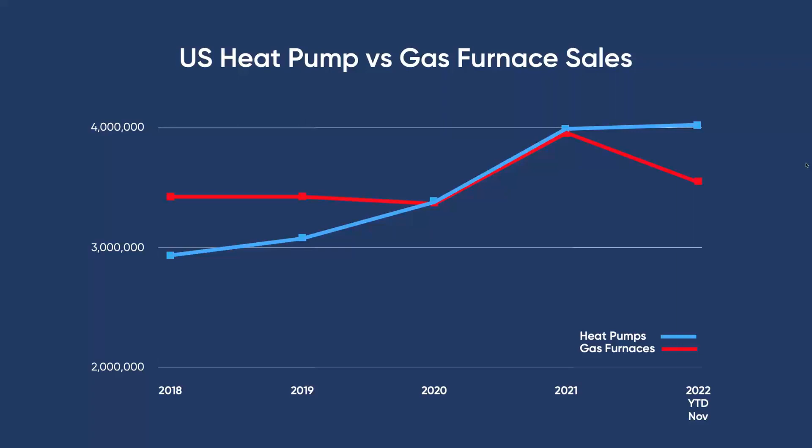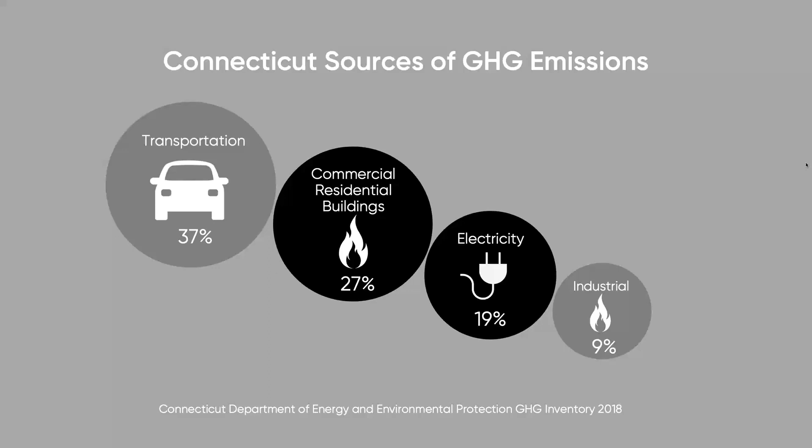And we're seeing these trends when looking at Connecticut's specific sources of greenhouse gas emissions - the second leading source of greenhouse gas is combustion in commercial and residential buildings, at 27%. When you combine that with greenhouse gas emissions from transportation, from electricity, from natural gas and coal being burned for electricity, and industrial uses, you're up to 82% of Connecticut's emissions coming from burning fossil fuels.

So there's a big movement to start regulating and moving away from this combustion.

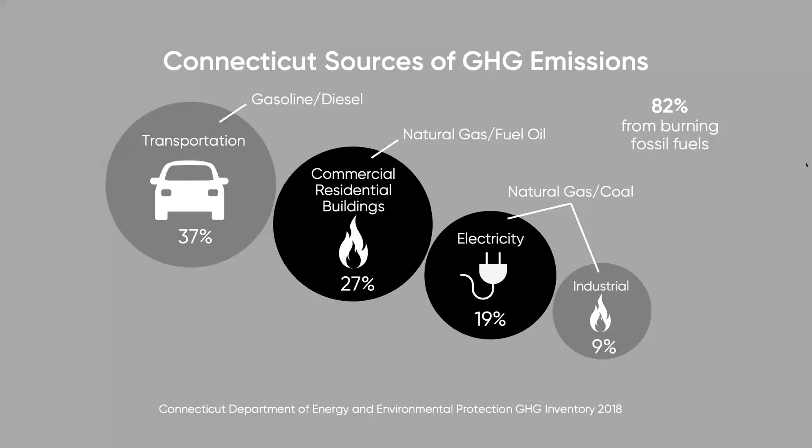And it's not only bad news, there's great news too. We're seeing these trends - who would have thought 10, 15 years ago, when wind and solar were some of the most expensive electricity sources on the market, that we'd see this radical transformation shift just when we needed it? Wind and solar becoming the lowest cost electricity options today, the fastest growing.

In 2022, I saw an article that 20% of our electricity is coming from renewables in the United States, and this is growing really quickly. Coal fell from 50% of our electricity mix in 2008 to under 20% today. So there's a radical shift in electricity production towards renewable energy.

And it's almost this perfect, great storm. Electric appliances that we'll be talking about in a second have gone from really wasteful and inefficient to really efficient, as evidenced by the LED light bulb, which is 5 times more efficient than the incandescent light bulb. And electric appliances have become more efficient, and electricity has gotten a lot cleaner.

And so you're seeing this movement towards electrifying everything - this theory that we should power all of our homes, all of our transportation, and as much industry as possible with clean, efficient, renewable electricity. So you'll be hearing that terminology, 'electrify everything', more and more. It's starting to become a popular term, and it conjures up that idea of a sustainable future.

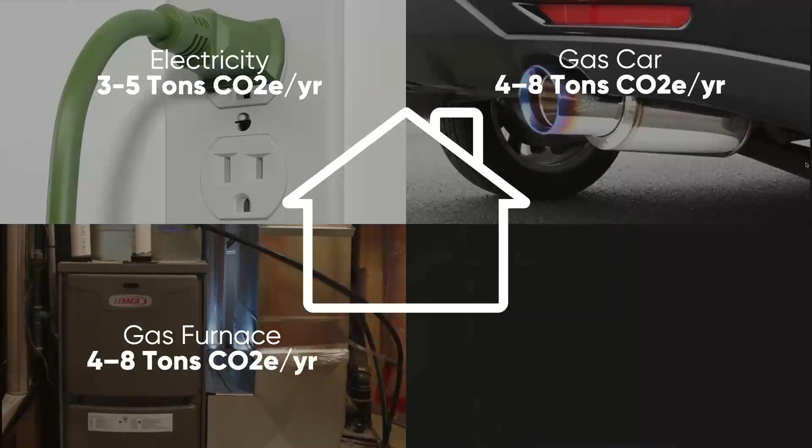The best way to really understand this is to think about our own homes. The four biggest sources of emissions in any home in the United States are: the electricity we consume, typically around 3 to 5 tons of carbon emissions per year; one car, 4 to 8 tons, and most families have 2 cars; one gas furnace, pretty similar to a car in terms of emissions produced over a year; and a gas water heater, which is surprisingly high. These are the four largest sources of carbon emissions in any of our lives.

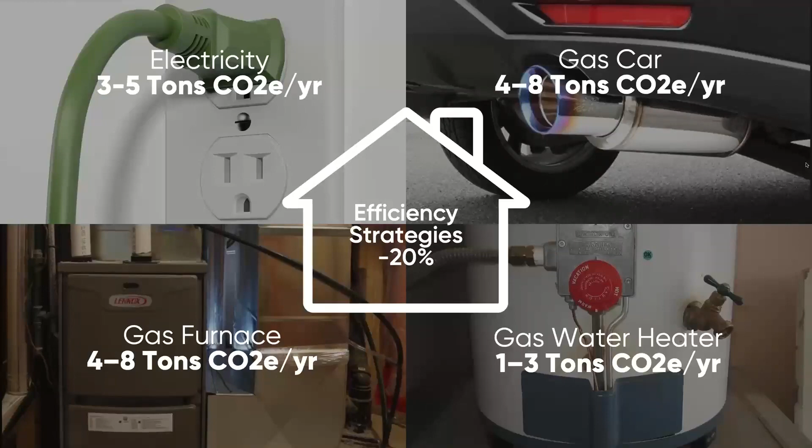If we employ these efficiency strategies, which we've grown up with, like turning the lights off, getting a more efficient car, driving slower, turning the heat down, taking cold showers, all these things, you might reduce these numbers by 20% if you're really diligent and take cold showers frequently, which most people don't like doing. But compare this with an electrification plus renewable energy strategy, and you can see how much more effective this is.

It's possible to get renewable energy. Anyone can do it today by signing up for a green power plan, putting rooftop solar on, or subscribing to community solar if that's available in your area. So you can get 100% renewable electricity. You can charge your car with that. You can use that to fuel your heat in your home and your water.

Instead of all those numbers you saw before, we're creating zero emissions for all these four largest sources of emissions in our lives. A typical home, instead of producing 20 to 30 tons of carbon emissions per year, could be producing zero. This is what an all-electric home, a zero-energy home, could also achieve.

One of the beauties is that the electrification technologies have efficiency built into them. Your electric car is many times more efficient than a gas car. And that's true for heat pumps, heat pump water heaters, just like the LED light bulb. So you get built-in efficiency with electrification.

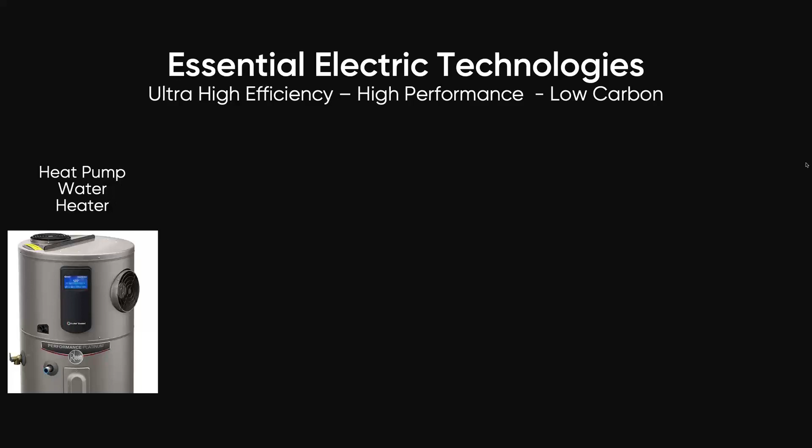So the technologies that really make all-electric homes possible are all ultra-high efficiency and high-performance products that we'll talk about specifically: the heat pump water heater, heat pumps for space heating and air conditioning, induction ranges and cooktops, electric fireplace inserts, which are less talked about but also pretty amazing and something you should be familiar with. And then, not always a top-of-mind concern, clothes drying—obviously using gas for that is not great. Electric dryers are good, but these heat pump dryers are pretty amazing. They're starting to be available.

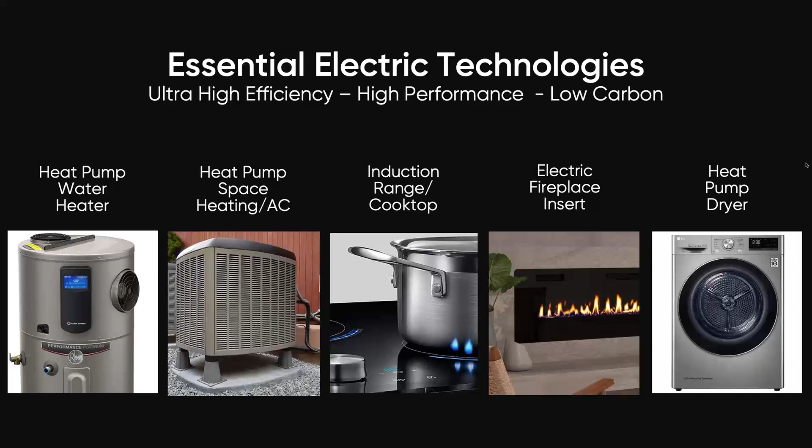Behind a lot of these technologies are heat pumps, and those can feel really magical to people because they're a little hard to describe how they work. Some of you are very familiar with these, but I like to point out that our refrigerators are heat pumps. This technology has been in our lives for decades, available for over 100 years, and it's been perfected over that time. So this is not some kind of new technology.

They're insanely efficient. Just a couple summers ago, you may have read about the Portland heat dome. Before we turned our air conditioning on, it was almost 100 degrees in our kitchen, and our refrigerator was still making ice. So you can see these things can make cold air even when it's hot, and obviously the opposite is also true, which we'll talk about.

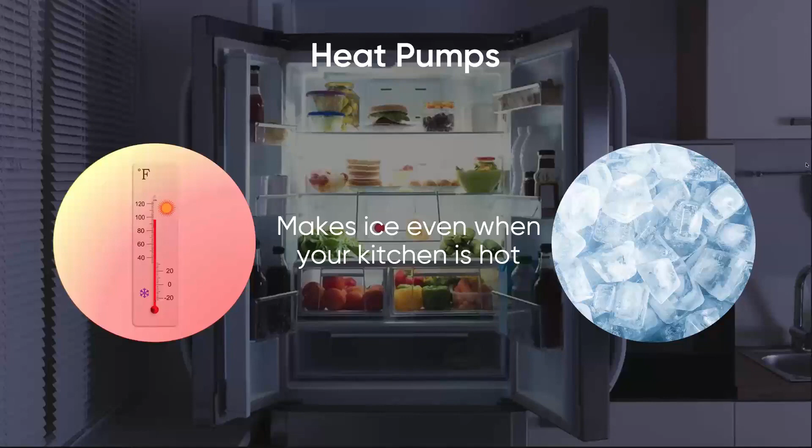They've become perfected over time, which is why the levels of efficiency they're achieving make it so that they're cost competitive, and in some cases cheaper to operate than burning gas directly in our homes.

So let's dive into some of these individual technologies, and then we'll see how they all fit together into the modern electric home of the future and home of today.

The heat pump water heater is something near and dear to my heart. Brian was saying to our hosts just before the call, I do have a heat pump water heater costume. I didn't bring it today, but I'm happy to. I'll put a link of me dancing in it later on in the chat.

Heat pump water heater is a really game-changing appliance, just like all heat pumps. It is 3 times more energy efficient than an electric resistance or gas water heater. The only thing it exhausts is cold air, so there's interesting potential there to cool the space.

It draws the heat from the ambient air, from the room it's in, so they work really great in basements or garages. But they can also go in utility closets, and I'm happy to answer questions on the amount of airspace needed. They just draw that ambient air and exhaust cool air.

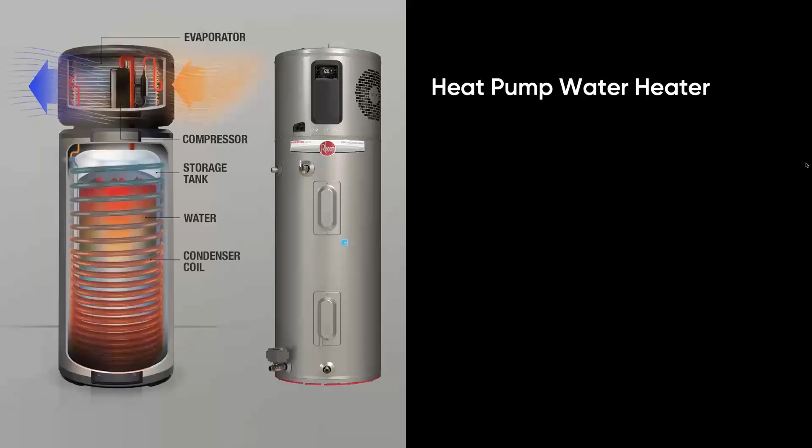They're quieter than gas power vent models. The newest heat pump water heaters are at 45 decibels, which is the range of a quiet dishwasher. And they're smart and able to be connected to the internet so they can participate in demand response programs, or if you want to turn down your water heater while you're away using your phone, they can do that too. So let's look at how heat pump water heaters work.

They pull that ambient air from whatever space they're in. And I should also say they can be ducted. In my house, for example, this doesn't happen - it's not required too often to duct a heat pump water heater, but if you're in a tight spot, you can duct it to the outside.

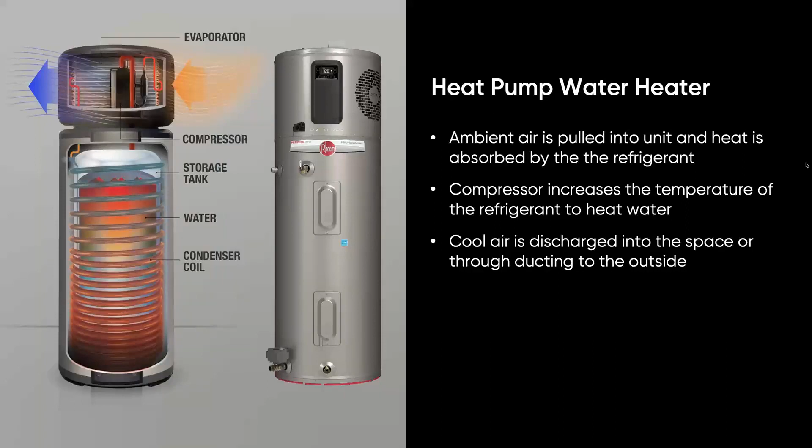You pull that air into the unit. The refrigerant extracts the heat, the compressor increases the temperature, and that cool air is discharged, and the heat then goes to heating the water. Most of the models on the market are what are called 240 volt heat pump water heaters. So they run in heat pump mode most of the time, but then they have electric resistance rods that can function as a backup, just like a normal electric water heater.

So let's look at the comparison of the different water heaters on the market. The 2, or we might even say 3 most common water heaters are - you can see on the left side - the electric storage water heater with electric resistance rods. Water heating efficiency is measured in UEF, so 0.90 is the electric storage UEF. And you can see tankless. These are kind of typical numbers, but there'll obviously be a range of efficiencies for each of these devices.

Right, exactly. So you may see lower than that on any of these, or higher - you can kind of see the range there. I won't read out all the numbers, but you can see how heat pump water heaters are 3 to 4 times more efficient than any other type of water heater. And Brian just put the numbers, the cost. The one challenge with heat pump water heaters is the upfront cost.

You can get your electric or the premium gas storage water heater for around $1,000, sometimes cheaper, the tankless as well. But the really efficient electric and gas water heaters are more expensive, and those are a little more cost comparable to the 1,700. As we'll talk about in a second, there are great rebates, 30% tax credit, on heat pump water heaters now, so that can take a chunk out of the upfront cost.

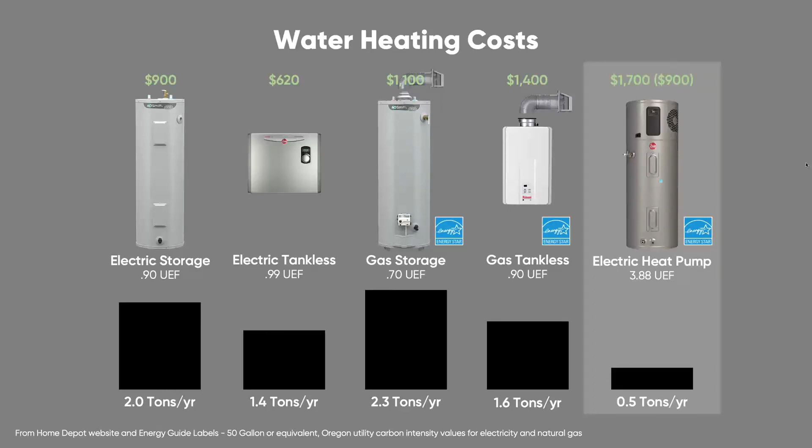This shows carbon emissions. Electric water heaters, 2 tons. The gas water heaters, even these efficient ones, close to 2 tons. Heat pump water heaters are 0.5 tons a year of carbon emissions, and of course that can go to 0, like Brian said, if you combine it with renewable energy. So much to celebrate with heat pump water heaters.

Just wanted to give a little landscape of what heat pump water heaters are on the market today. The big 3 makers are Rheem, A.O. Smith, and Bradford White. Starting from the left, Rheem is available in Home Depot, and as of 2022, they just announced their Rheem 120 volt plug-in water heater. You can actually plug that into an outlet, which is probably not necessary for new construction where you can just run the 240 volt, but these work great in retrofits, especially in gas markets.

A.O. Smith just released their latest Voltex AL water heater. I happened to write an article about it, and there's a lot of exciting things, like they have water connections both on the top and the side. It's 0 clearance, it's 45 decibels of sound, so a really fantastic water heater. Bradford White is only sold to contractors through distributors, but a really great water heater as well.

I also wanted to highlight that there are split system heat pump water heaters where the tank and the condenser are separate. This is the SanCO2, which is where the condenser is outdoors and the tank is indoors, but there's also Nyle water heaters where the condenser has to be in a semi-conditioned space as well. So lots of options, and increasingly more so for heat pump water heaters.

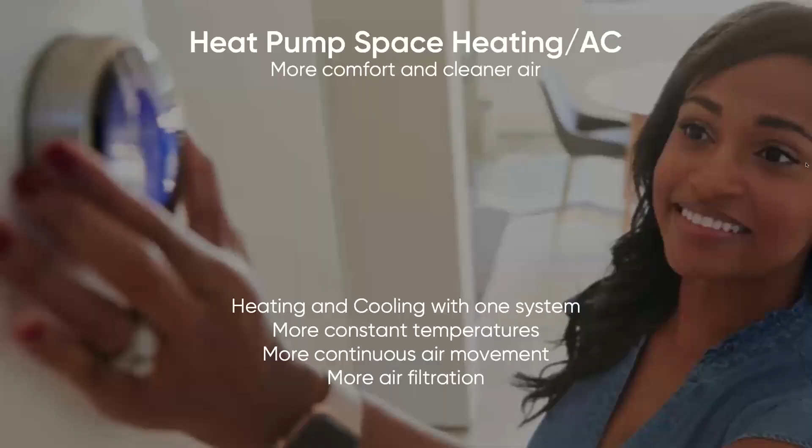Okay, I've been rambling on heat pump water heaters. All these come with 10-year warranties, so I think that can be an important thing to point out. This technology is a little bit newer in the water heater space, heat pumps, but these have been around for about 10 years now, and the warranties are really bomb-proof. So the products are really not something that should be considered newfangled or radical. And just on that, the typical water heater warranty is 6 years, so they have higher warranties than typical water heaters.

All right, space heating and air conditioning - heat pumps, again, you're coming to the rescue. You can heat and cool with one system, which is fantastic. No other technology can do that.

One of the things that we find about these, and we hear consistently, and we've experienced in our own home, is that because these things tend to operate at a lower heat output than a gas furnace, which is producing literally thousands of degrees when you ignite it, it's a more constant warm air that's flowing through your house, so you have more air movement. There are 2 really good things that come with that: one is you get more consistent temperatures, you don't get hot and cold spots so much in rooms. You also get more air moving through filters, which means cleaner air.

So there's a lot of things that add up to a better feeling in the home, a more consistent temperature instead of that on-off that's typical with gas furnaces. And this makes a home feel more comfortable.

There's two really major configurations of heat pumps. There's the ducted ones where you've got the outside unit and then inside an air handler that's blowing warm air through ducts. And then in the other configuration, the outside unit is pumping refrigerant to a wall-mounted head. Sometimes those heads can be put into ceilings, et cetera. And there's combinations of these systems that you see.

I think for new construction, any one of these systems could be appropriate. Both of them have the same effects.

One of the questions that we get asked a lot is, will heat pumps work in cold climates? I think part of the reason this is such an important question here in the United States, not so much in other countries, is that here they were really first introduced as a cooling option because they're so much more efficient than a lot of typical air conditioning products. So they were most popular in the South, and those units didn't have a high heating load. So the products being manufactured in this country were focused on cooling and not so much on heating. And that's starting to change now.

It's really important that if you're in the northern part of the United States - Connecticut is in zone 5, which is still pretty moderate compared to Maine or Minnesota - you have some heating days that you need to take care of. It's similar to what's happening here on the West Coast. You need a heating system that's designed for heating, and I think this is where the perception from the old days is problematic, because if you've got a unit that was designed really for cooling, it's not going to be very good at heating.

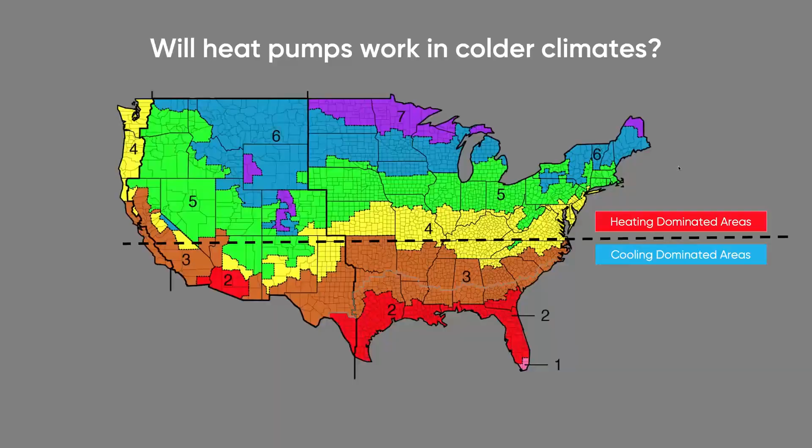But the new systems, particularly the cold climate heat pumps, are designed with heating in mind. They're purpose-built to excel at heating, and they're called cold climate heat pumps, but we're seeing them employed all over the place just because they're so efficient. In general, a cold climate heat pump is going to be somewhere between 75 and 95% of its rated capacity at minus 13 degrees Fahrenheit. So basically, in most places of the country, you do not need any kind of heating backup.

The heat pump itself is going to take care of all the heating loads and of course all the cooling loads. And there's things that make these work - the inverters and the cold climate programming. They've got really intelligent defrost cycles. They can be more expensive up front than a lower cost conventional heat pump, but they do have much lower operating costs, which again can pay for the difference in the upfront costs.

So the cold climate heat pumps are really revolutionizing the heating space, and I think what's happening is that the cold climate standard is going to become almost the go-to product, unless you're in the southern part of the United States where you don't really need it.

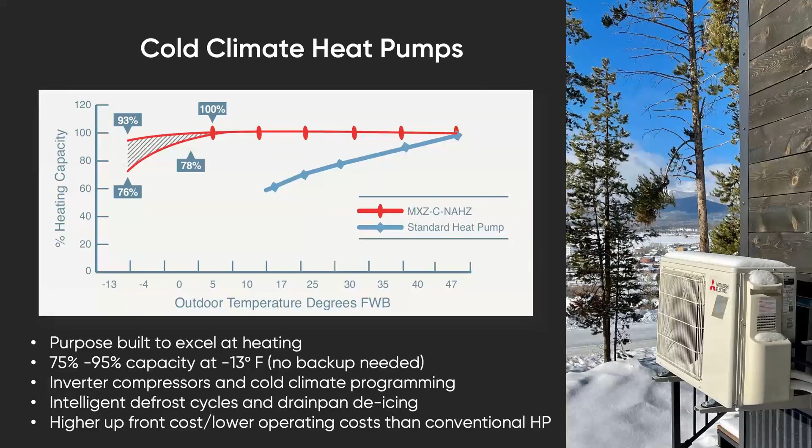Hey Brian, real quick on that note, I just wanted to highlight the comfort of heat pumps that Brian talked about earlier - there's no sacrifice, and I can speak to that. For years we've had our ductless heat pumps, 10 years now, and I would always turn them off at night. We just did a webinar with Efficiency Maine that studied the best way to run a heat pump, and it's to leave it on all the time, set it and forget it, they say. It's changed our life - my wife is so much happier. We set it and forget it.

And I just got my December, January electric bill - it was 20% lower than last year where I was turning it off at night. So increased comfort on your heat pump, and I just learned something recent.

So yeah, really good. And by the way, if they work in northern Maine, they're going to work pretty much anywhere. We had some really good conversations with the Efficiency Maine folks who have had really good success installing them in homes in Maine.

Okay Joe, are you doing induction? Oh, is that me? Sure, I can do induction.

So induction cooking has been all over the news. It's sort of good in some ways, but there's been a lot of silly conversations about it too. I don't think there's much to debate: induction is just so much better technology than gas that anyone complaining about potentially losing their gas stove obviously hasn't tried induction, because it's so much better.

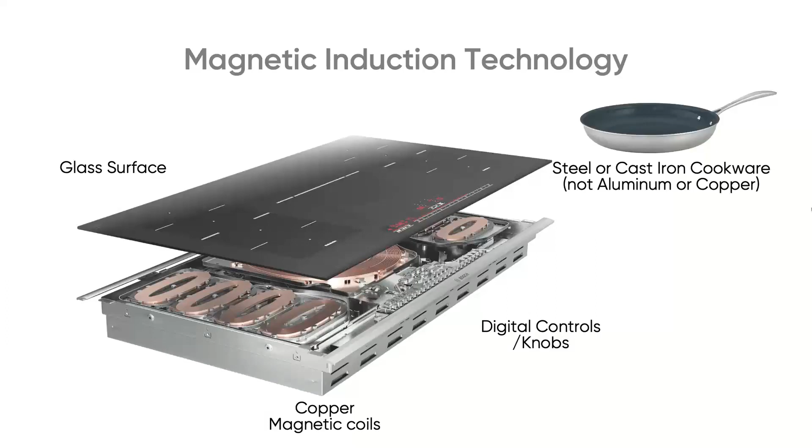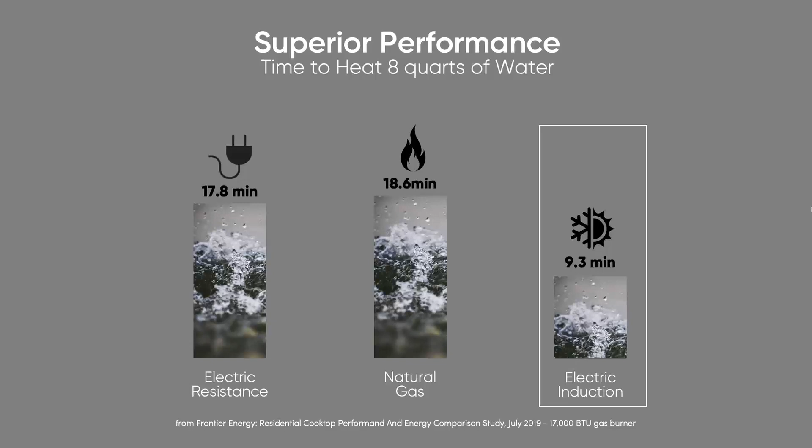There are lots of performance stats, but the most compelling one is that an induction range, even a decent one, is about twice as fast to boil water as even a really big gas burner or an electric resistance burner. Once you get used to this, it's hard to go back.

They come in a lot of different models, and the offerings keep getting better. They started at the high end, but now you're seeing good models starting around $1,000—like Samsung's new one with nice knobs and a beautiful finish. You can spend up to $6,000 if you want that high-end Wolf range look in a 36-inch range. It's possible to achieve that look with induction as well.

One last thing—there are interesting new induction stoves coming out with battery backup, which we've read about and discussed with manufacturers. They're more for the retrofit market, with a 4 kilowatt-hour battery that can just plug into a regular outlet. We're tracking that, but lots of new ideas are coming out with this electrification technology.

Two more quick things to touch on: electric fireplace inserts. We'll look at a case study in a second, but these things blew my mind. When Brian was raving about electric fireplaces I was kind of dismissive, but when I saw them live, I knew we had to get one for our house too. The technology has improved immensely—the flames are super realistic.

You can turn them up or down as you want, turn them on without heat and run them in the summer. They're usually 110 volts.

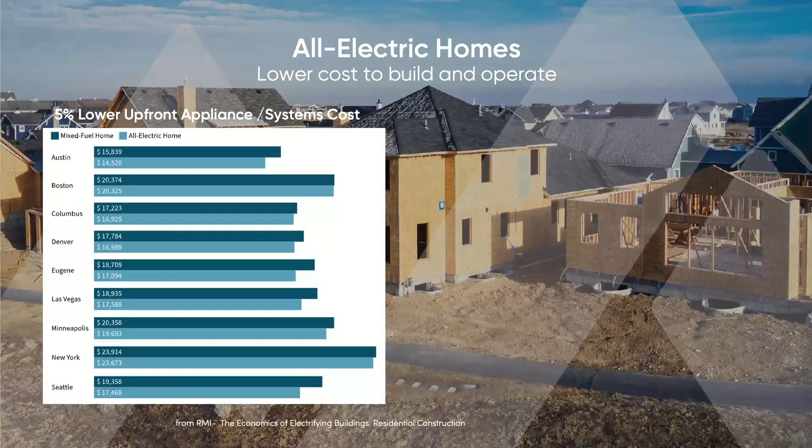Okay, so now we're going to get into the portion for builders and the Inflation Reduction Act. We've seen these studies that we mentioned before - all electric homes are cheaper to build. RMI did a study looking at 9 cities and showed that the savings from not having to put gas infrastructure in averaged about 5% lower cost for the infrastructure and the appliances, and then operating costs were close to 15% lower for all electric homes.

That might not be a huge deal for builders, but that's something to sell to owners. For these all electric homes, you're going to be spending on average 15% less.

Yeah, and you can see obviously that comparison can change from location to location. We don't have any Connecticut specific data for you, but in general, I think it's safe to say that it's at least going to be similar in costs and very likely to be cheaper. One of the main reasons that drives the lower cost for building is that you don't have to pay for the gas hookup. So while some of these appliances might be slightly more expensive, the savings from not having to hook up to the gas system is really significant.

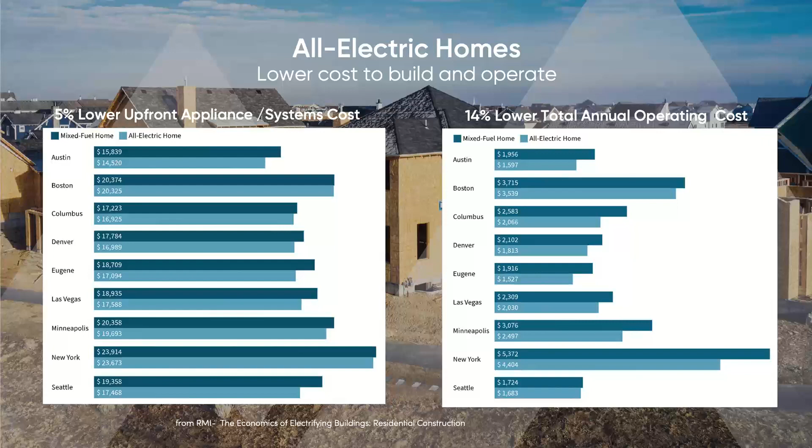I don't know what's going on with Connecticut specifically around gas hookups and incentives for gas hookups, but in many parts of the country, including here in Oregon, and California's already done this, those line extension allowance incentives for connecting to the gas system are getting smaller or going away completely, which is going to tilt the playing field towards electrification even more strongly from a cost standpoint.

Okay, so on the Inflation Reduction Act - we could spend a lot of time talking about this, so we're going to fly over this a bit because there's a lot to talk about. A lot of this information comes from a partner organization we work with closely, Rewiring America, who was very influential in getting these credits included in the Inflation Reduction Act. They have a great calculator product - Google Rewiring America IRA calculator - and if you're interested in your own personal situation, it'll tell you what's available to you.

You can put your zip code in, your homeowner status, and your household income level, and it'll tell you what you can expect in terms of the IRA. So that's a great product. But today what we're going to do is talk about these basically 4 chunks of money that come with the IRA. There's low income allocated funding for consumer rebates called HEEHRA and HOMES. That's the first one.

There are consumer tax credits available to anyone who has a tax bill. There are new energy home credits focused on builders. And there are some workforce and manufacturing programs that won't affect us necessarily directly, but indirectly are going to have a big effect on making electrification and clean energy technologies more available and lower cost.